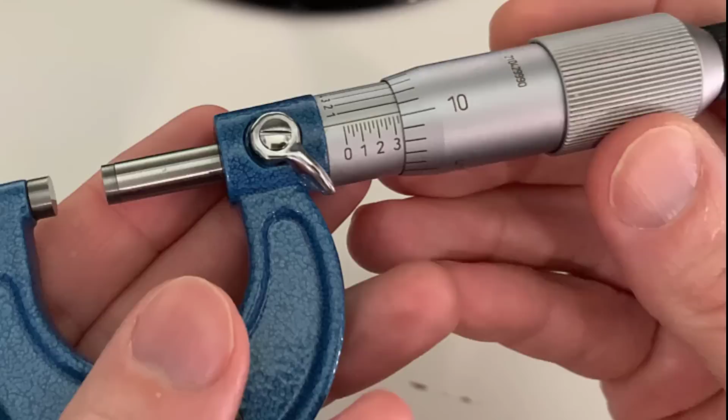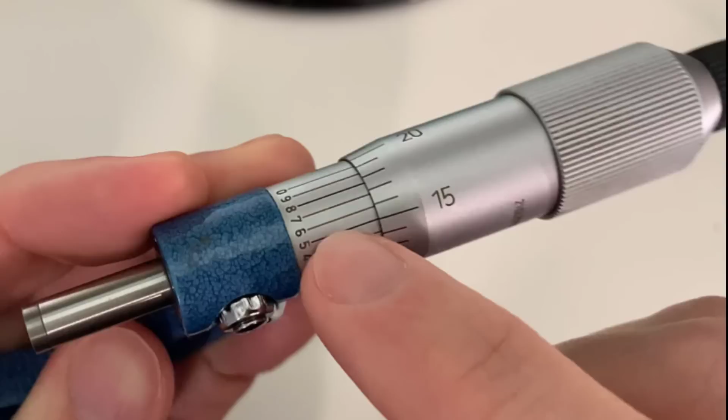On most inch mics, there are 3 different scales. One on the sleeve, one on the thimble, and a third one wrapping around the sleeve called the Vernier scale. You'll add up all 3 of these to get the final reading. Let's go one by one.

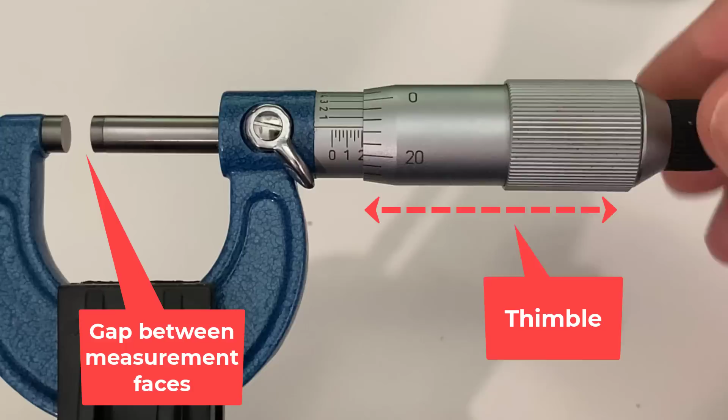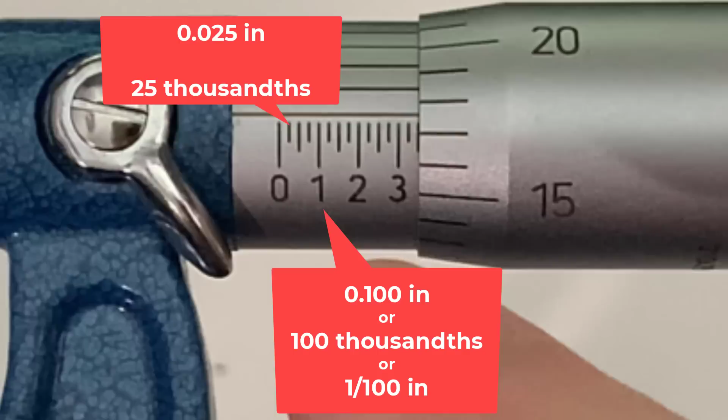As I loosen the thimble, the gap gets wider, and I can see more numbers on the sleeve. Each one of these numbers is 100 thousandths, and the marks in between them are 25 thousandths. You read it by looking at how many of these lines are visible on the sleeve. For instance, I'm just past the 2, so that means this is 200 thousandths or 200 thou.

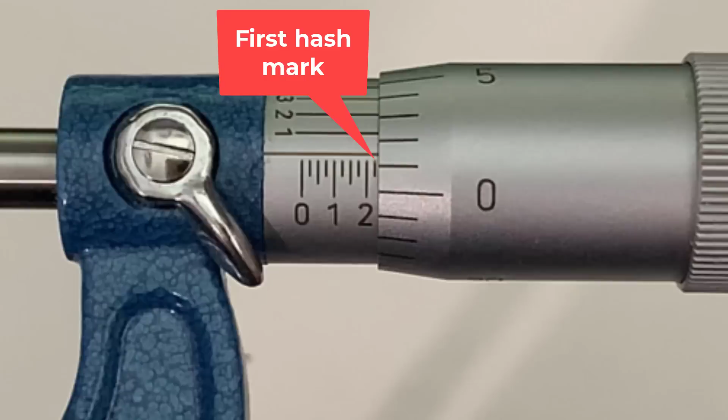If I spin the thimble one more rotation, you'll see the first hash mark after the 2, which means the reading is now 225 thou. I turn the thimble one more rotation, and I can now see another hash mark past the 2. So I'm now at 200 plus 25 plus another 25, or 250 thou.

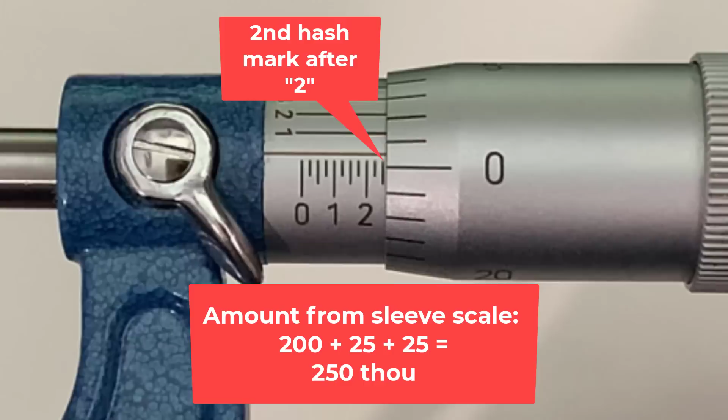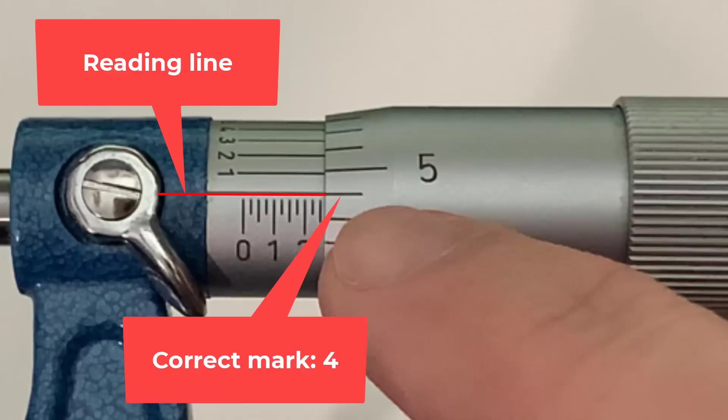Now if I rotate the thimble just a little bit more, I'm now in between the hash marks. So I need to go to the thimble scale, where each mark represents 1/1000th of an inch. To read this, you look at the mark that is at or just past the reading line on the sleeve. So this was 0 down here. Now I'm at 4. So this is 4 thousandths that I need to add. So the total is 250 plus 4, or 254 thou.

I open it just a little bit more, and now it's 5. So this is now a total of 255 thou. Remember that I said each one of these marks on the sleeve was 25 thou? Well, that corresponds to 1 full rotation of the thimble.

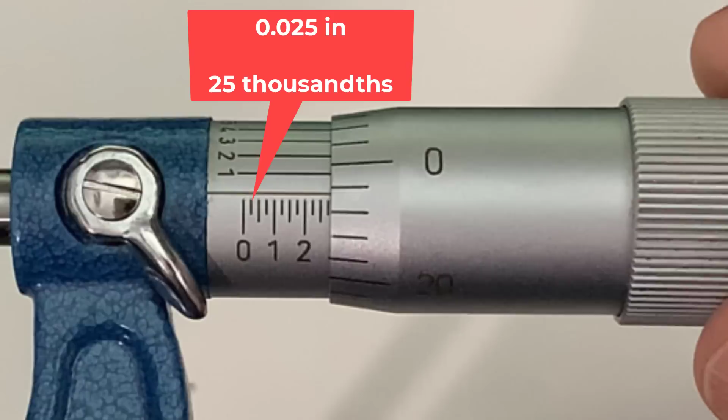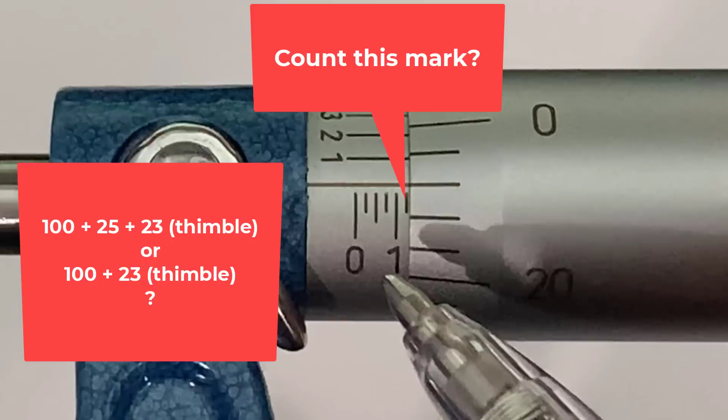Now what about this? On the main sleeve, I see the 1, and also a little bit of the next hash mark. Do I count that next mark? Is this 100 plus another 25 for that other little dash on the sleeve, plus another 23 from the thimble, or do I not count this dash?

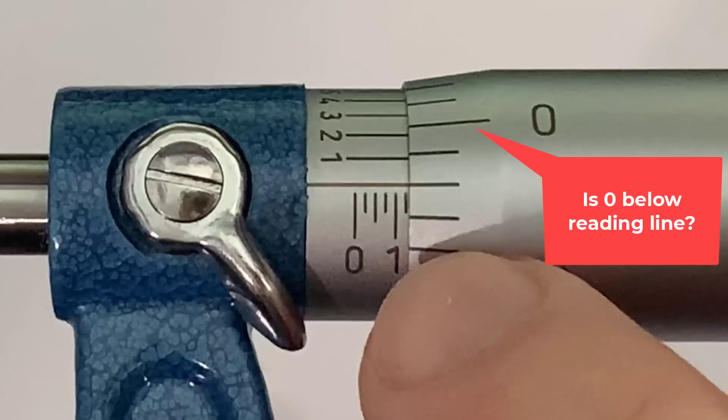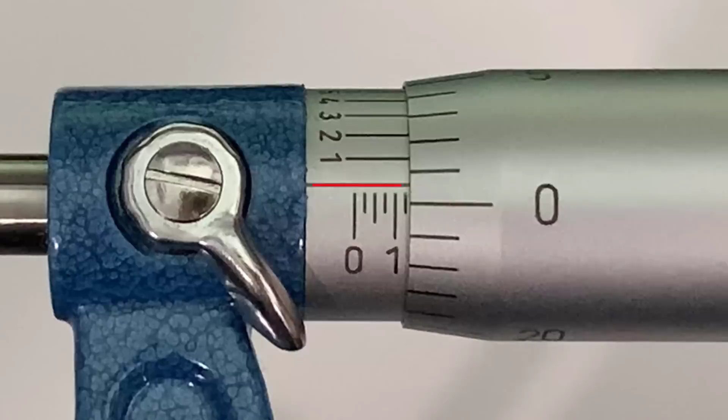If you're close to a line, the rule is you only count it if the 0 is below the reading line. So here I don't count it because my 0 is above the reading line. This is 100 plus 23 from the thimble for a total of 123 thou. Now I open it just a little bit more, and the 0 is now passed, so I do count the dash after the 1 on the sleeve. So this is now 125 thou from the sleeve scale, plus 1 from the thimble for a total of 126 thou.

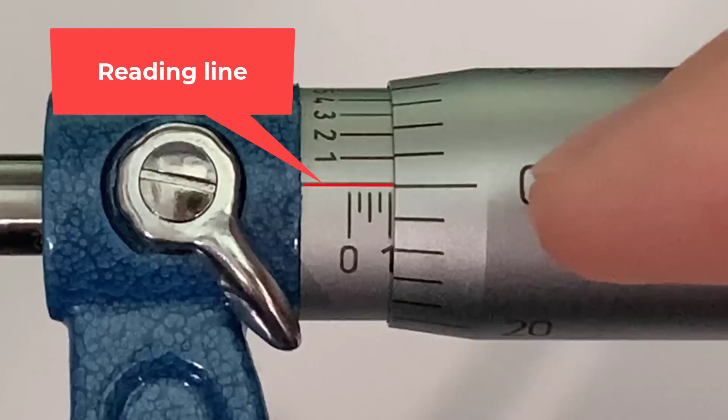So again, the rule is that this 0 on the thimble has to be past the reading line for any visible dash on the main sleeve to count. Similarly, the numbers on the thimble don't count unless they're at or below the reading line. So right now I'm at 100, still at 100, still at 100, and now 101, still at 101, still at 101, and finally 102. If your measurement lands in between these lines, you need to look at the Vernier scale, and we're going to explain that next.

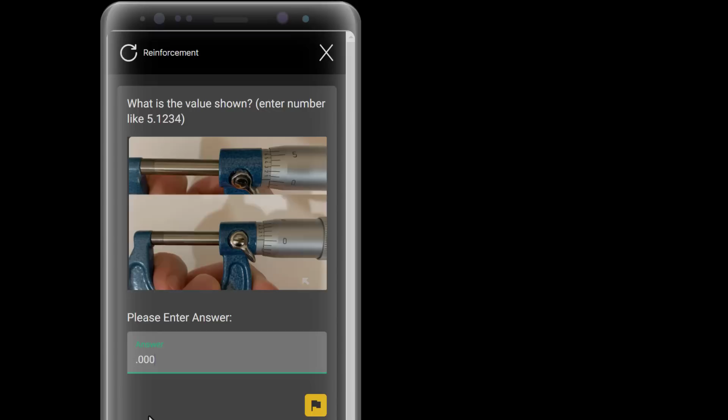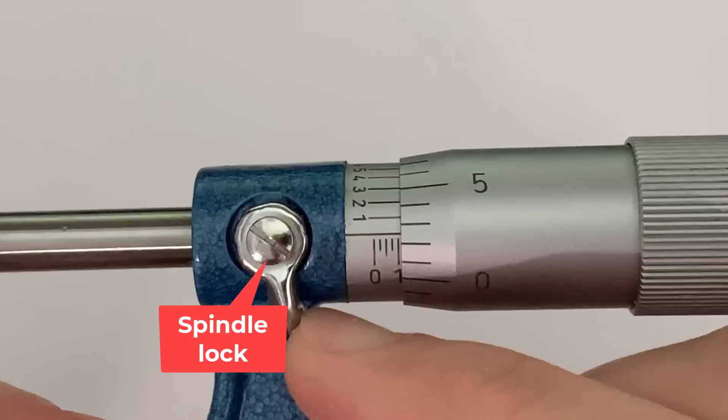Now when reading the Vernier scale, it's especially helpful to use the spindle lock to hold everything in place while you're moving the micrometer around. Each one of these lines represents 1/10,000th of an inch, otherwise known as a tenth. Note, in a machine shop, tenth generally means 10,000th of an inch and not 1/10th of an inch.

To read it, I rotate it around and look for the line on the thimble that most closely matches the line on the Vernier scale. In this case, it's this 5. Then I'm going to add 5/10ths to my total. When you're starting out, it's easiest to write the values down on paper to keep track of everything.

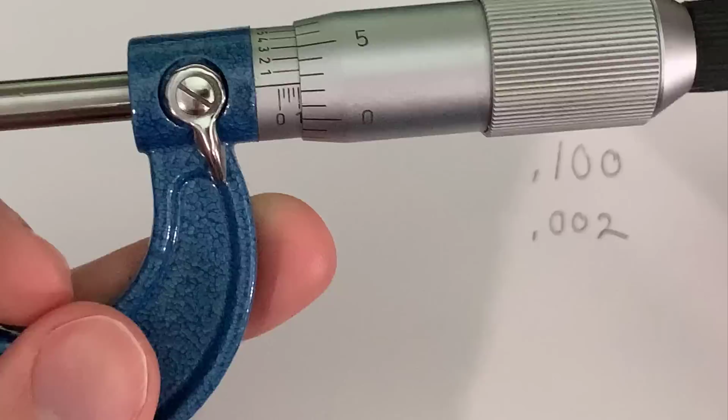I've got 100 thou from my main scale here, and then 1, 2 from my thimble. Remember, I only count numbers that are below this reading line. So I'll add 2 thou there. So that brings me to 102 thou.

And then I'm going to add 5/10 from my Vernier scale. So I'll stick a 5 at the end there. So my total is 0.1025 inches.

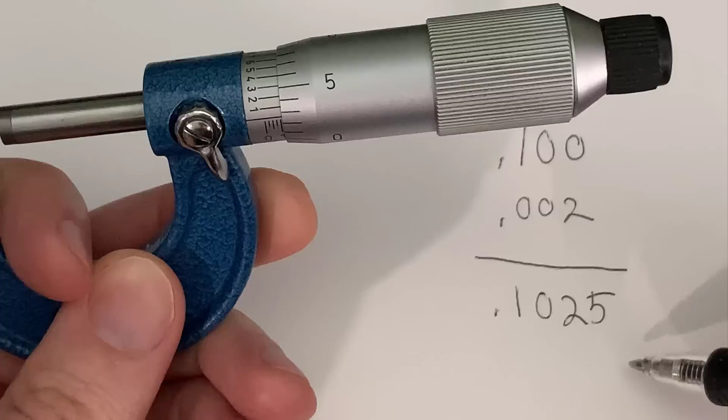Okay, let's try another. So I've got 100 from my main sleeve scale plus 3 more hashes. So that's 175. Now, do I count the 2? The 2 is not below my main reading line, so I do not count that. So I'm at a total of 100 plus 3 hash marks for a total of 175 thou from my main sleeve scale.

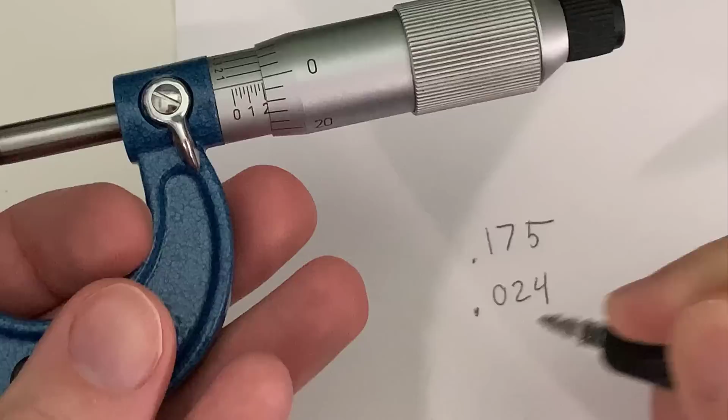And then I need to add my thimble, and we're almost around to that 0. So this is 20, 21, 22, 23, 24. So I'm going to add 24 thousandths from my thimble. And that brings me to 0.199 inches, or 199 thou.

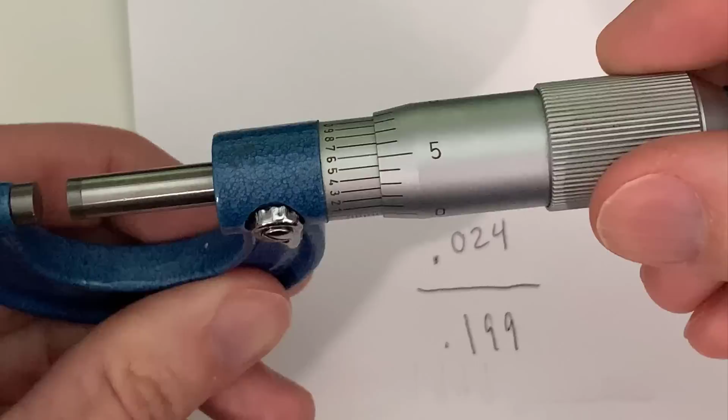And then I'm going to rotate around my mic and try to find the Vernier line that most closely matches the thimble. And that is right here. So that looks like it's a 9. So I'll add that as 9/10. And my total is now 0.1999 inches.

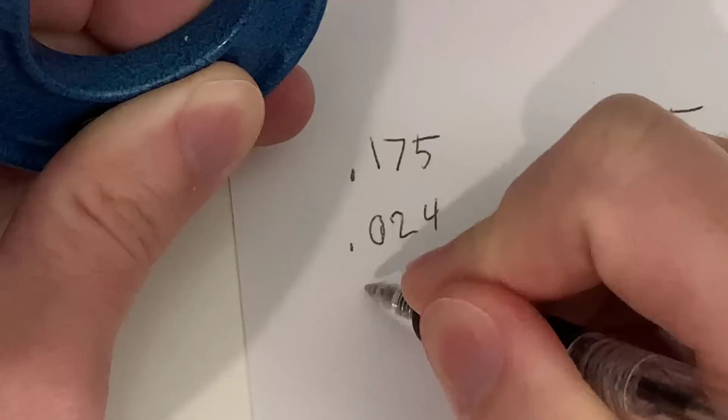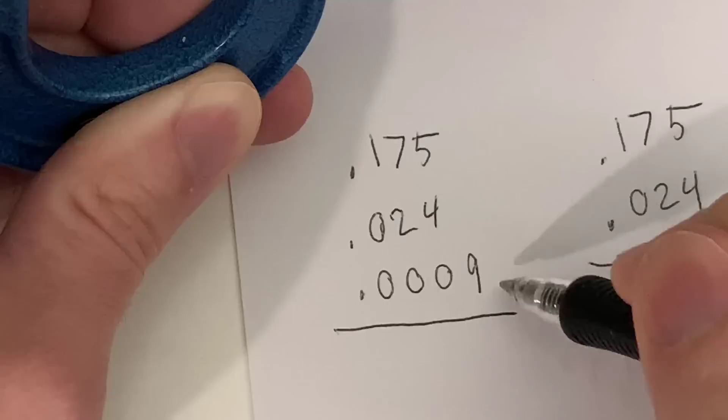Now I could have added it up like this, writing 9/10 on its own line. But the reason I didn't do that is because it's somewhat easy to forget one of these zeros and then accidentally add 9 thousandths instead of 9/10. So instead, I just tack on the tenths after I've added up the rest of the values.

One other common mistake when reading the Vernier scale is to accidentally use the numbers from the thimble scale as tenths instead of the ones on the left here. So here we can see this lines up on the 6th line. Don't add this 5. Make sure you look to the left and add the 6 for 6/10 onto your value.

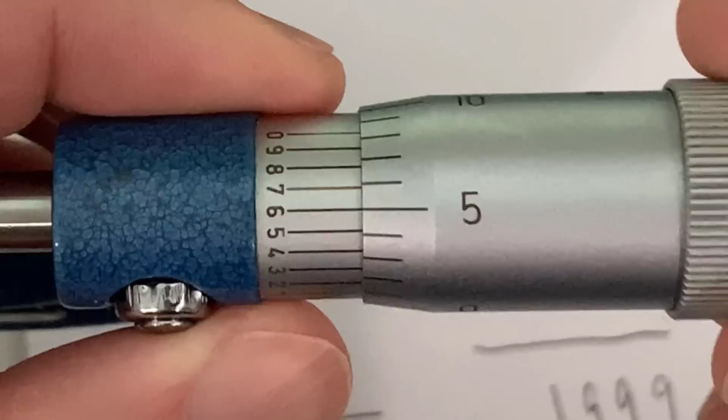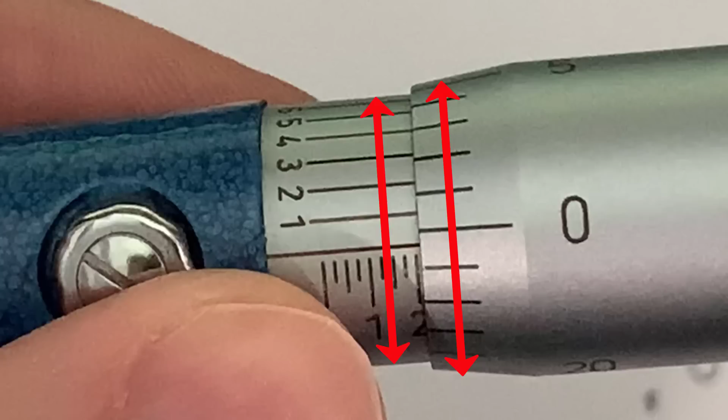And a final thing to watch out for when reading this Vernier scale is to make sure you're looking directly straight on the mic when you read it. So here you can see the 6 is my line that matches up. But if I were to look at the side, it almost looks like the 4 matches up from this angle. And this is because the thimble is a little bit taller than the sleeve, so it can be deceptive if you're not looking straight on.

The best way to practice is to measure some known distances, like these gauge blocks or pin gauges. Our training app also has lots of examples to practice on, as well as a lot of other content, like how to use calipers and read drawings.